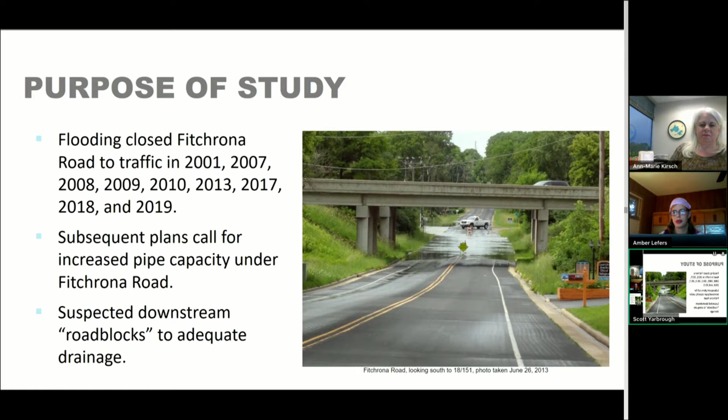So as we looked at a more comprehensive way to address the water levels in this area, we have to look at hydrology and some of the rainfall and natural events that occur. And Claudia Guy is going to give some background history on hydrology and watersheds and the importance of stormwater and drainage management. I'm going to turn it over to Claudia now. All right, thank you, Chris.

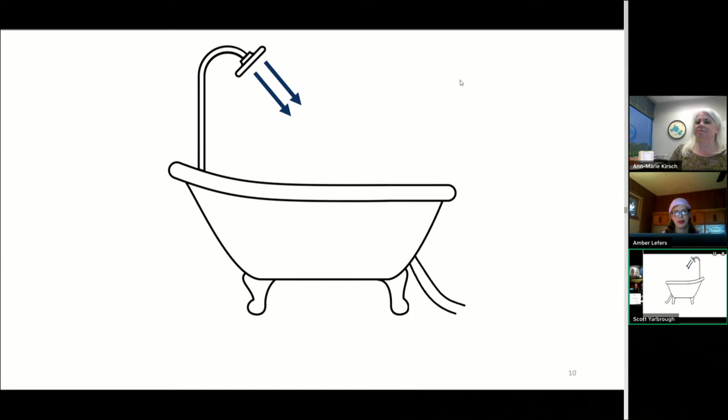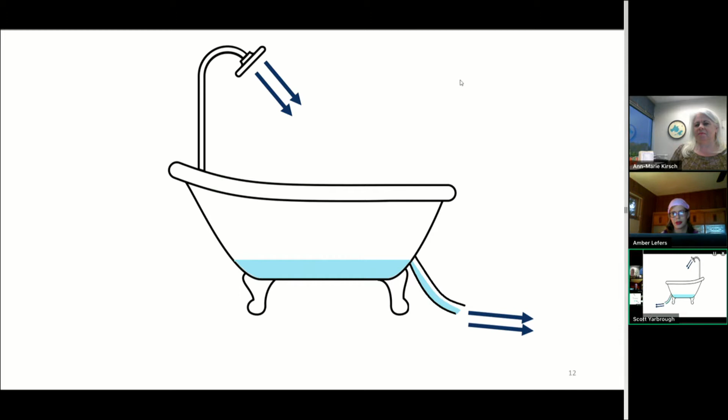All right. So I wanted to start off with a scenario that we're all familiar with, which is we see here a bathtub, and when you turn water on, water can enter the bathtub, and it will eventually rise to the elevation of the drain. And if water is able to exit the bathtub as quickly as it is entering, then water will generally stay at the elevation of the drain until the water is turned off. However, if you were to turn on the faucet,

and I'm sorry, I'm trying to close a couple windows here because I can't see my screen. All right.

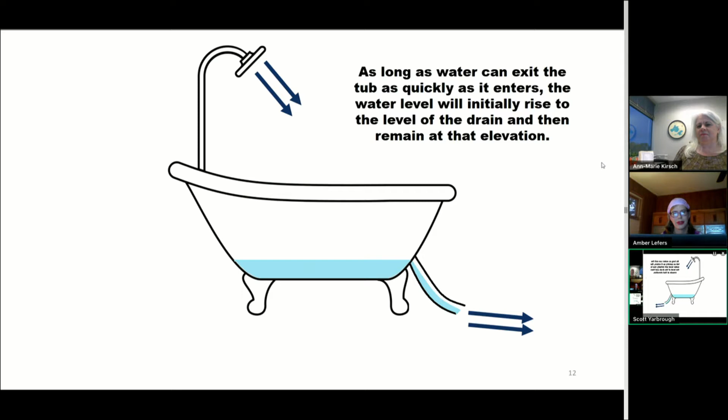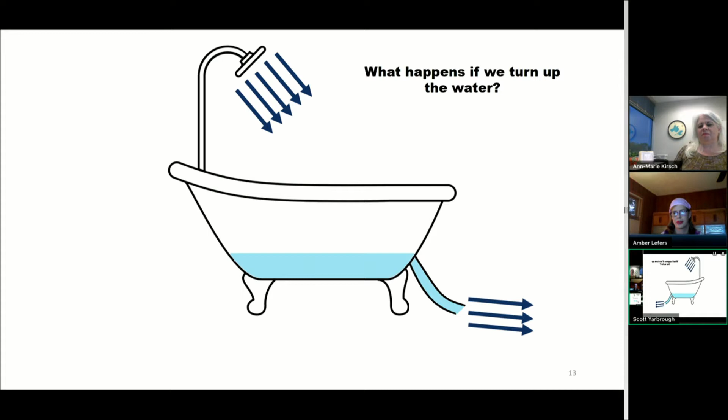So as long as water can exit the tub as quickly as it enters, the water level will initially rise to the level of the drain and then remain at that elevation. And if you turn up the water, then you'll see that water will leave the tub more quickly, but if water is entering the tub more quickly than it's exiting, then the water level will eventually rise.

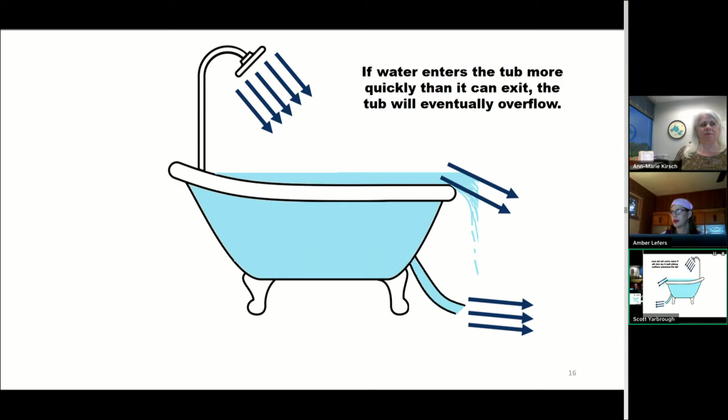So you'll see here that the water level is rising, and then eventually it will find a place where it can overflow the tub. So this was depicted by arrows. You see 5 arrows entering the tub and only 3 are exiting, so that's why we had that rise in elevation within the tub.

So you might be asking yourself, what does this have to do with the Fitchrona Road flood study? So it's a pretty good analogy for a pond. And in this case, you can see the pond has a culvert, which is leaving the pond. And if it were to rain, then water would enter the pond. And if it's a light enough rain, then water is able to exit the pond. And the elevation of water within the pond might not be terribly affected during that rainstorm event.

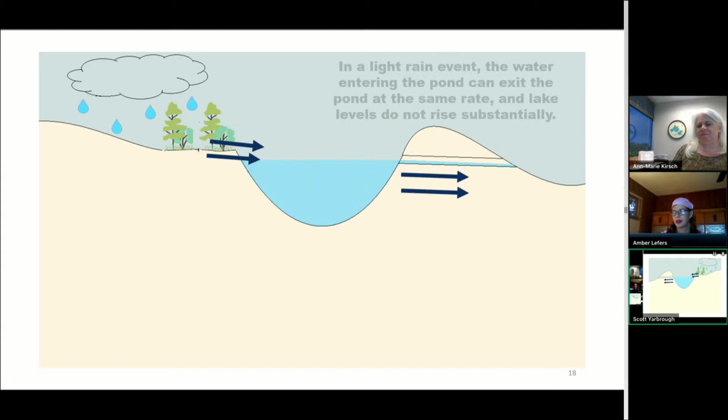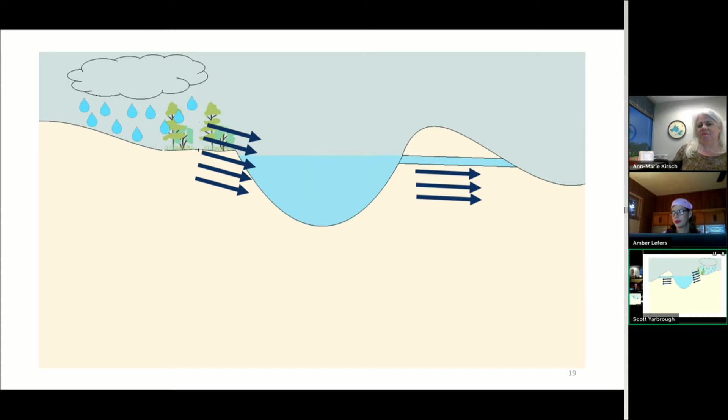However, if you have a much more intense rainfall event, then more water will be entering the system. And potentially, you will have more water entering than can exit. And when that happens, the water level will begin to rise, as we saw in the tub scenario, and it will rise again to the point that it finds a natural overflow path. In this case, there's an earthen berm there, and water will eventually overflow downstream.

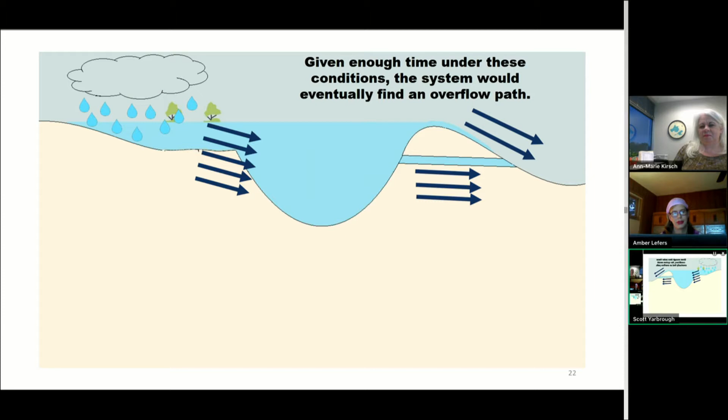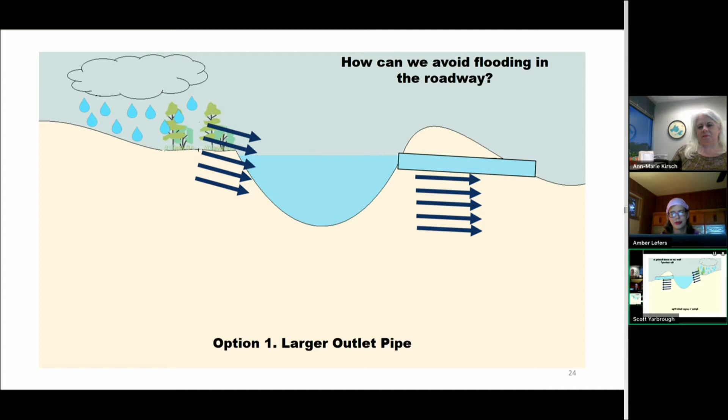So, how can we avoid flooding in the roadway? One option is, of course, to install a larger pipe, which will allow us to send water downstream more quickly. So for heavier rainstorm events, we will have the capacity to send that down more quickly. A second option is to add flood storage capacity.

So in the original scenario, you can see that the culvert is at the elevation shown, and that the water surface elevation in the pond is generally at the elevation of the culvert because it will exit at that point. So when it starts to rain, that's the starting elevation of the pond, and there's a certain amount of vertical rise that the pond can

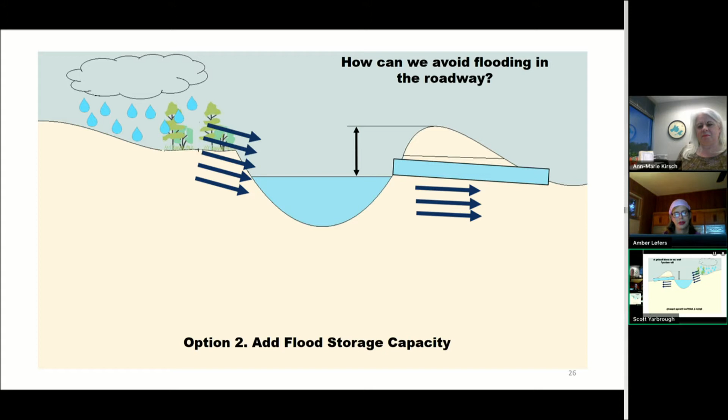go before it overtops. So if you were to install a lower culvert, then the normal pool elevation would be lower, so you would have more capacity for that pond to absorb a rainfall event before causing inundation of a nearby roadway.

And another quick concept that I just wanted to cover briefly is that there might be multiple constrictions that are downstream of the roadway that might cause water to back up. So it's not necessarily just one pipe downstream of the pond. It could be multiple pipes. It could be narrow constrictions, such as narrow ditches, things like that, which could cause water to back up.

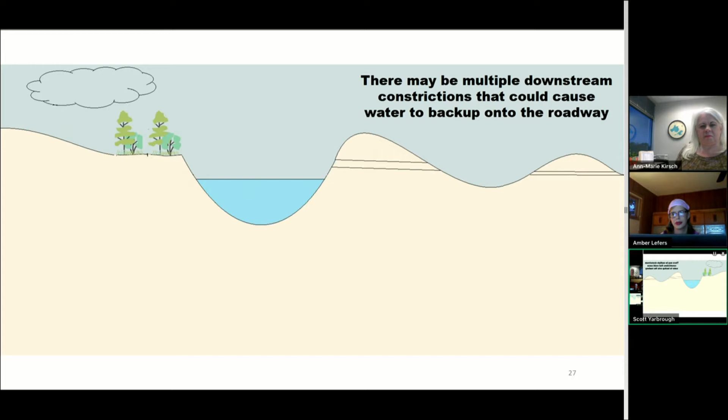So another thing that we're going to talk about a lot in this presentation is storm frequency. So when we do our modeling, one of the ways that we do that is by modeling different storm events. And basically, to explain to you what a storm event is, if you were to put a pot in your backyard on your porch and you kept it there for an entire storm event, at the end of it you would have water in that pot.

And if you measured the amount of water that you had in there, and for example, say you had 2.49 inches in that pot and it rained for 24 hours, in Dane County, that is classified as a 1-year, 24-hour storm event. But if you had, for example, a more intense rain event, the amount of water in your pot might be 6.66 inches over the same duration. And we would call that a 100-year, 24-hour storm event.

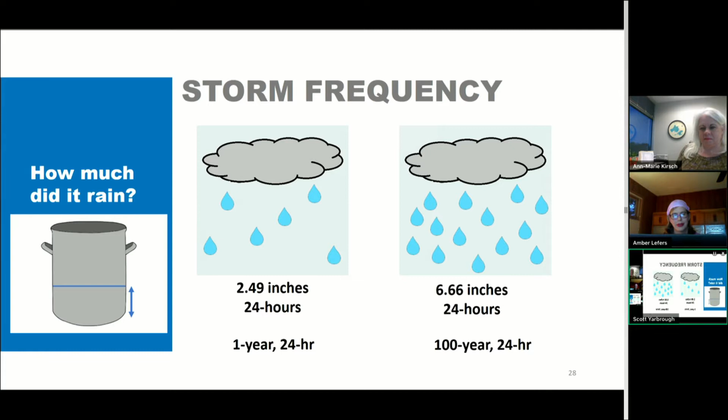Thank you. So what does that really mean when you say the 100-year storm event? When we talk about storm events, what we mean is the risk for a given rainfall total. So the 100-year storm has a 1% chance of occurring in any given year, and the 2-year storm event has a 50% chance of occurring in any given year.

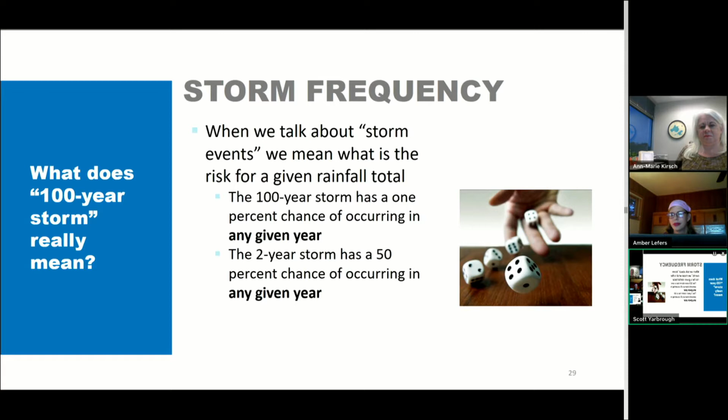So one thing that's important to note here is that it's the probability every single year. If you have a 100-year storm event one year, that doesn't mean that you're never going to have that storm event for another 100 years. Every single year, you still have a 1% chance of experiencing that storm event. And with a 2-year storm, it's like flipping a coin. You have a 50% chance of having that storm event occur any given year.

So another thing that I wanted to just touch on very quickly is this Palmer Drought Severity Index, which basically just shows the wet years and dry years. If it's near normal, then you would not see a bar appear at all, but if it's on the drier side, then you would see a red bar appear here, and if it's on the wetter side, then you would see a green bar appear here. And the higher the bar, the more wet or dry it is.

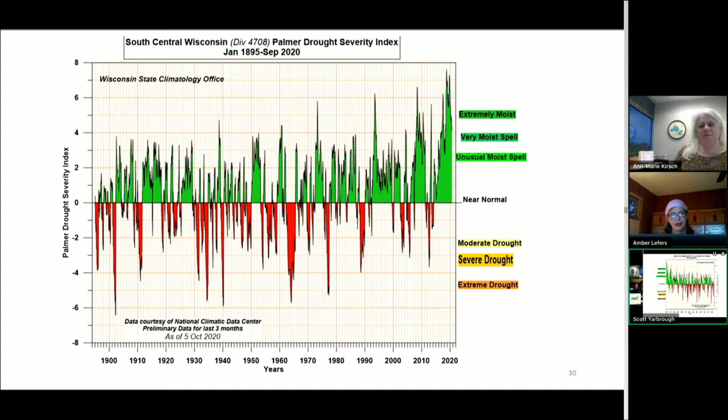And one thing that's interesting to note is that since the 1990s, you can see that you're having a lot more green show up in that area than red, and the bars are much higher in that area as well. So what that means is that we are experiencing wetter years, at least for the last 20 years, and you can see in the last 3-year time frame, it's really been the wettest that it's been since this has been recorded, which is 1900.

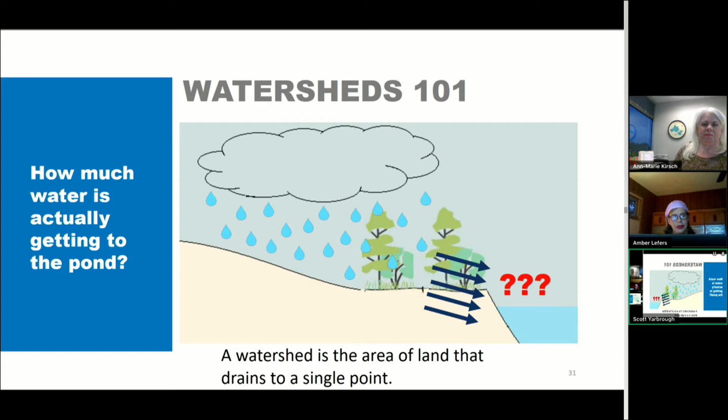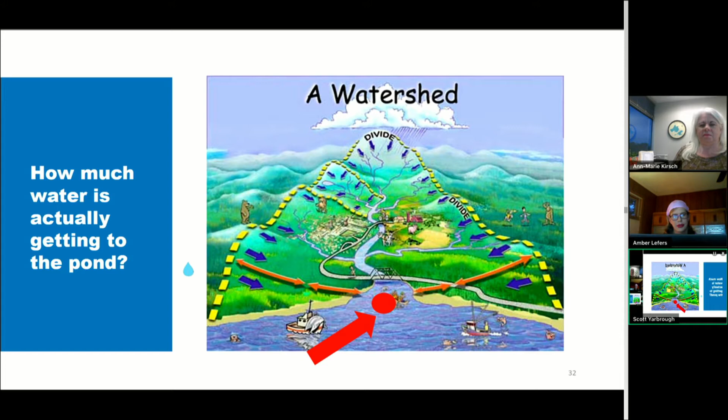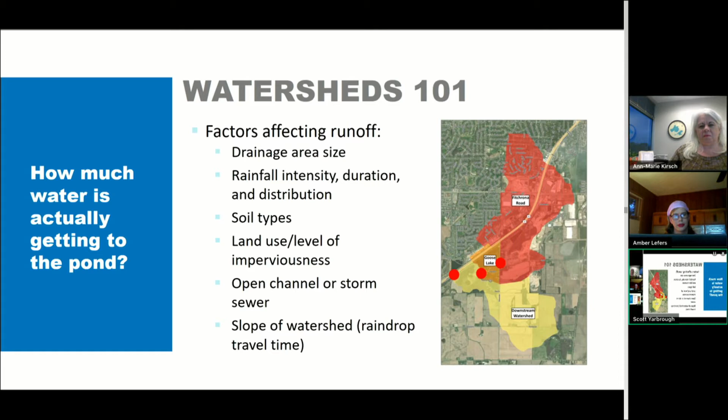And there are several factors that affect how much water actually gets to any given point. And those factors are listed here. Drainage area is, of course, a big factor: rainfall intensity, duration, distribution, soil types, land use, open channel or storm sewer, and the slope of the watershed. Just a few examples there. So with that, I'm going to hand this over to Ann-Marie Kirsch to give a project update.

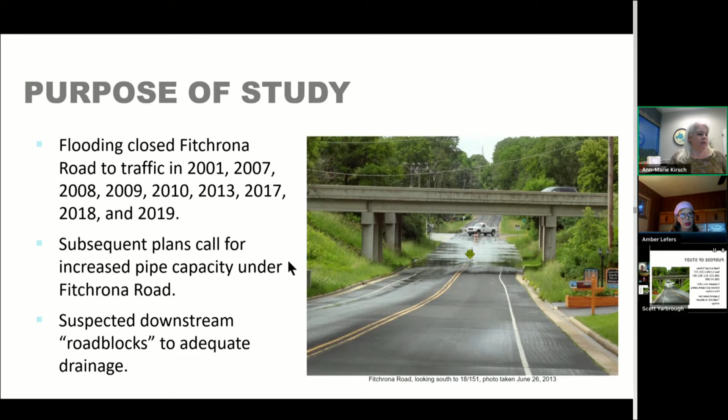So we have looked at doing, how's this going? There we go. So looking at a couple of different options, and we talked about them at the last public information meeting, and we're going to revisit those as well as some new options that we looked at. So first, part of the previous public information meeting was to reach out to you, the residents, to say, hey, what have you noticed?

And what was nice to see is that the responses to the survey really did reinforce what's been observed by both the town of Verona and the city of Fitchburg. So it made us feel like we're really on the right path with looking at these downstream issues.

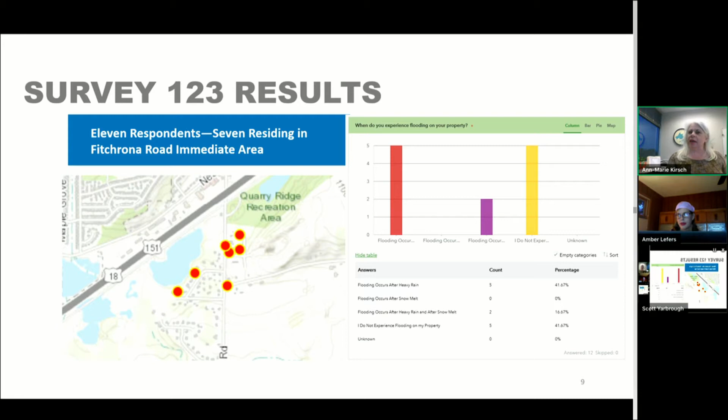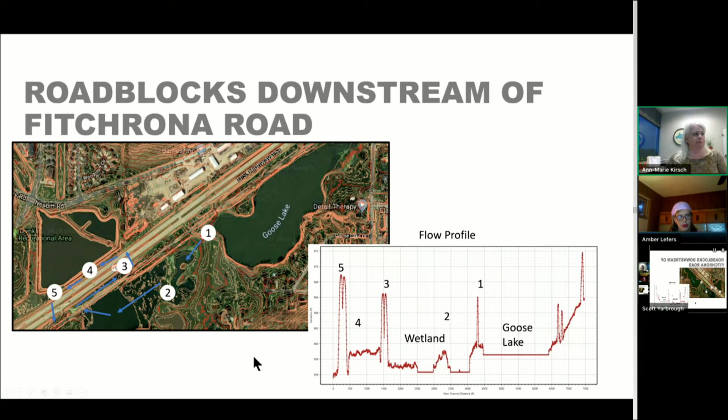Now, we have water flowing through the culvert and back along US Highway 151 and back under, sorry, I forgot, I need to do my, okay. Can you see my highlighter? There we go.

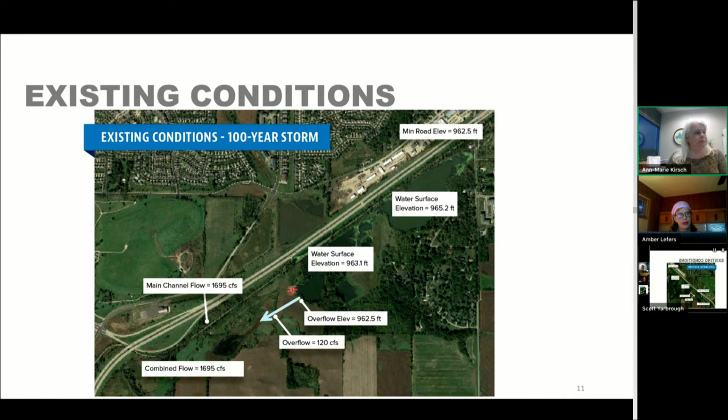So looking at this, we looked at not just the 100-year event, but we also looked at the more frequent storms, like the 2-year storm, which has a 50% chance of occurring in any given year, the 5-year storm, which has a 20% chance of occurring in any given year. And based on this analysis, we would expect that Fitchrona Road would be flooded on average about every 8th year at that 962.5 elevation.

And as Chris mentioned earlier, we are seeing more frequent flooding. And part of that is, again, tied to the very wet years and the length of time it takes for this system to drain once the flooding has occurred. Because if you get a storm when the water level is already high, that just backs it up even more than would have normally been predicted.

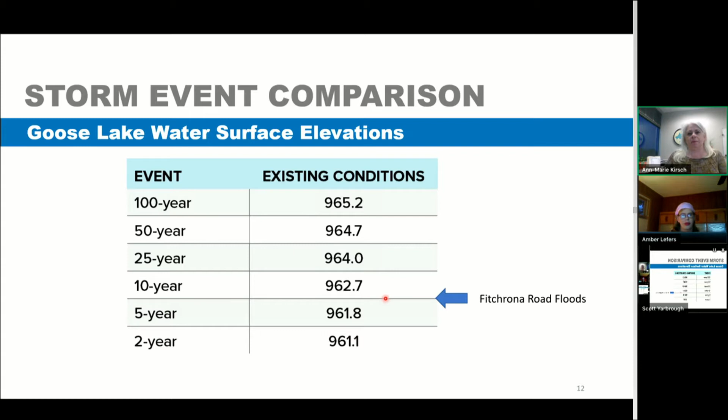So some of the issues we talked about at the first public information meeting, we talked again about the factors that affect the runoff, the size of the watershed, the treatment of the land on it, and so on. And one of the options would be, well, why can't we just raise the road? Raise the road at Fitchrona Road to get it out of the water.

Well, the biggest roadblock to that, so to speak, would be US Highway 18/151 and the overpass. It's already got low clearance. They have no plans to change the profile of these bridges anytime soon. And Fitchrona Road's becoming more and more of a collector or even a minor arterial in the neighborhood.

And then the other issues we're looking at is to minimize downstream impacts to the greatest extent possible, and also regulatory considerations, which include both regulatory floodplain issues as well as wetland and waterway impacts that are managed by Wisconsin DNR.

So to recap what we talked about last time, our option 1 was to increase downstream conveyance on the existing path through the 30-inch culvert. The second option was to look at downstream conveyance with kind of a shortcut on the downstream side of US Highway 18/151. And the third was to increase storage in the system, like Claudia was talking about. What can we do to start with a lower water surface elevation in that tub so we have more room for the water that's coming in?

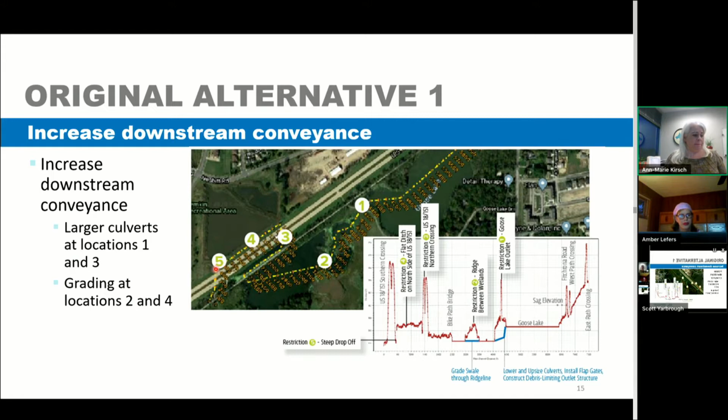Well, as we started looking at this, at first blush, we thought this would work, but it really doesn't matter how big you make that 30-inch culvert or how much grading you do between the wetlands, or if you increase Goose Lake. Because in this case, that triple cell box culvert under US Highway 18/151 is still a roadblock. The 100-year water surface elevation at this location is approximately 963.8. So even if you can make everything upstream bigger, like Claudia was talking about, there's still nowhere for the water to go.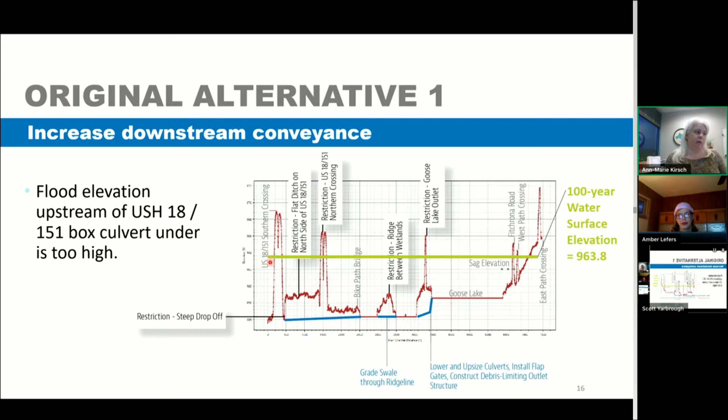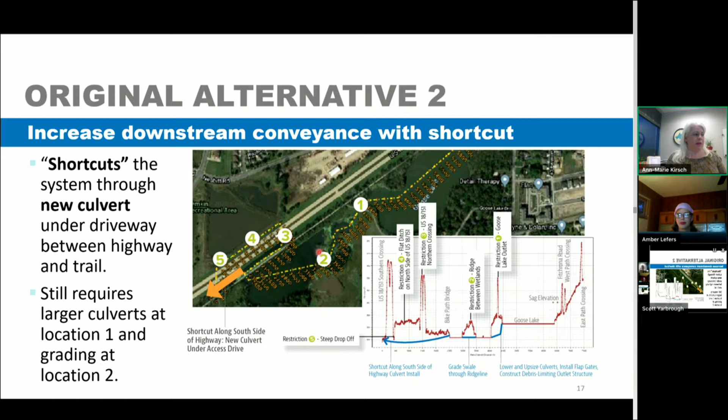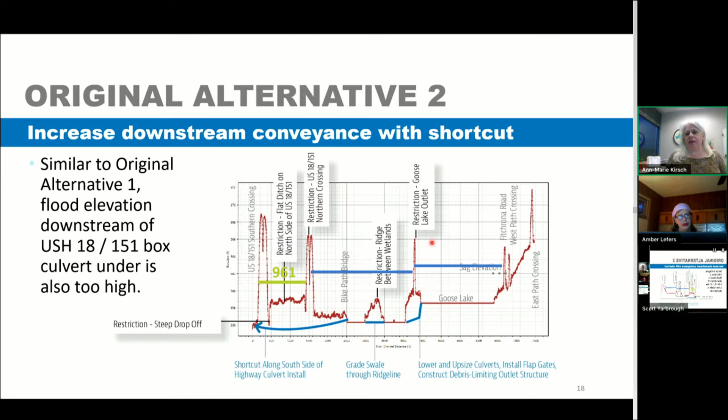Well, even though the water surface elevation is lower, about 961 for the 100-year on the downstream side of the culvert, and that is lower than the lowest sag point of 962.5, it takes a lot of energy. It takes a lot of work for the water to get through this system. And as it goes through the system, it's still backing up to the elevation that would put Fitchrona Road at risk.

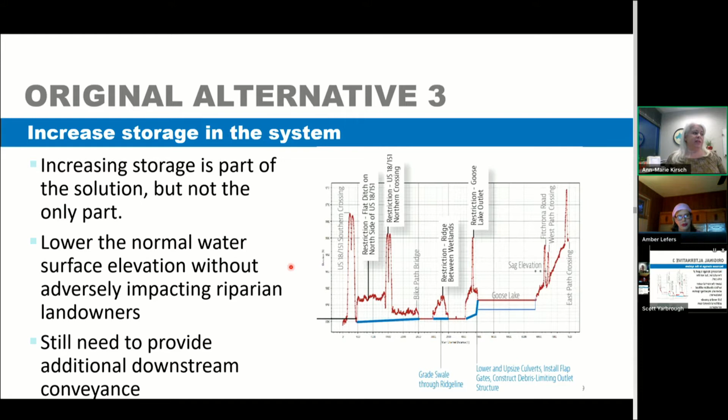So we also looked at storage in the system, and we understand that increasing storage is part of the solution, but not the only part. We still need to deal with these conveyance issues. So what can we do to lower the normal water surface elevation without adversely impacting riparian landowners? And we still need to provide additional downstream conveyance.

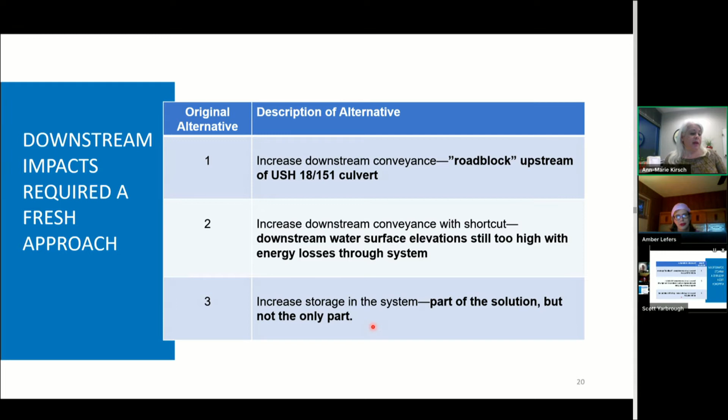So with that, we looked at alternative one. There's still a roadblock upstream of the US Highway 18/151 culvert. We looked at increasing the downstream conveyance. We still had too many energy losses in the system. We still couldn't force the water downstream fast enough to truly fix it for Fitchrona Road. And increased storage in the system is still part of the story, but not the only part. So looking at this, it really required a fresh approach, which will be the next thing we talk about after we answer any questions that some of you may have so far.

So were there any questions? It doesn't look like. Claudia, Amber, or Scott, do you have anything to add before we move on to the next section?

I just would like to add just a little bit of additional thought to the slide of some of the alternatives, 1A and B, and that is... We're not there yet. Are you talking about the ones that we looked at originally? Or are you looking ahead?

I was just going to state that there had been a few different ideas from folks to install a culvert through a driveway along 151, and it had been discussed for a number of years, and at the time it looked like a cheap and easy solution to providing some relief throughout the system. But as Anne Marie pointed out, there were faults with that particular system and idea.

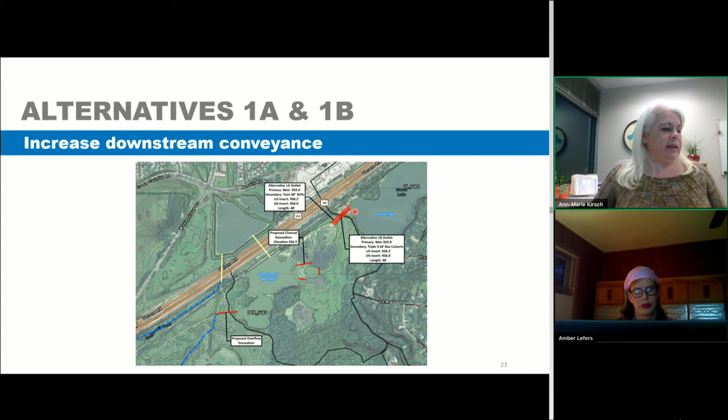So what are the impacts to this? Alternative 1A with the smaller of the 2 outlet pipes with the twin 48-inch diameter circular pipes reduces the water surface elevation for the 100-year event, again, that 1% chance storm, to about 964 feet, which is about a 1.2 foot reduction from the existing conditions.

The other big change is that we're reducing the water surface elevation in that interior wetland complex by about 1.4 feet. And then the final major change is that this overflow elevation is 958 feet, and that changes the overflow from 120 CFS to approximately 305 cubic feet per second. And then again, this water would flow through this little wetland and then rejoin Badger Mill Creek downstream here.

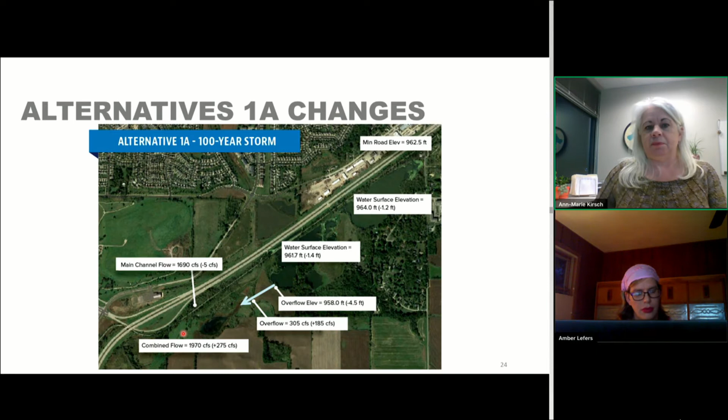Alternative 1B, the big change is that the triple cell box culverts have a significant impact on releasing water from Goose Lake itself. And now for the 100-year event, again, the 1% chance storm, the water surface elevation is reduced to 962.9, which is about 4/10, about 5 inches higher than the low point in Fitchrona Road. Again, the water surface elevations in the internal wetlands are reduced, and the overflow to the natural wetland to the southwest is increased to approximately 370 CFS.

The other big change that you'll see is not just in elevations, but because the conveyance is improved downstream, the time that the road is flooded is greatly reduced. Under current conditions, because the downstream flow is so constricted by that 30-inch pipe, really the only way for water to escape is through infiltration, which is very low because of the types of soils, or evaporation, which takes a long time to evaporate this much water.

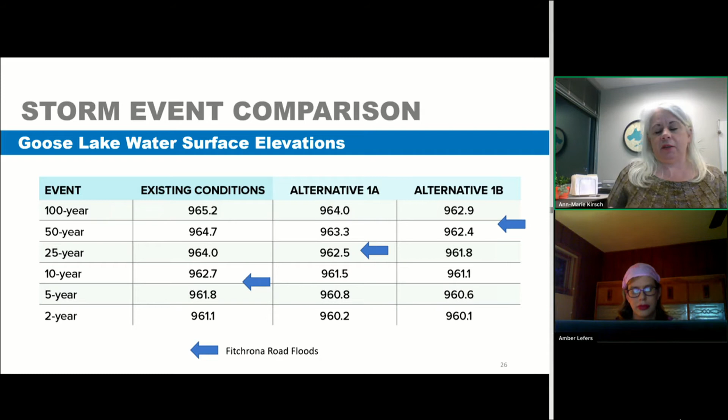Now, the good news that comes out of this is that under existing conditions, we talked about this, we would expect that Fitchrona Road would be flooded at about the 10-year event. So something that's a little bit more than 10% chance in any given year. Alternative 1A would reduce that flooding to about a 25-year event, or have about a 4% chance of occurring in any given year. And then alternative 1B reduces that flooding to between a 50 and 100-year event. So again, it has less than a 2% chance of occurring in any given year, assuming you're starting with normal water surface elevations in the Goose Lake system.

So alternative 2 is similar to alternative 1B, but what we're proposing is to change the downstream discharge location to discharge along Military Ridge Trail. So some details on that. Again, we're seeing the triple cell box culvert out of Goose Lake. We're looking at interior drainage improvements within the internal wetland area. We're looking at a proposed channel excavation again, or lowering this natural knob of this overflow to allow water back out of the wetland system.

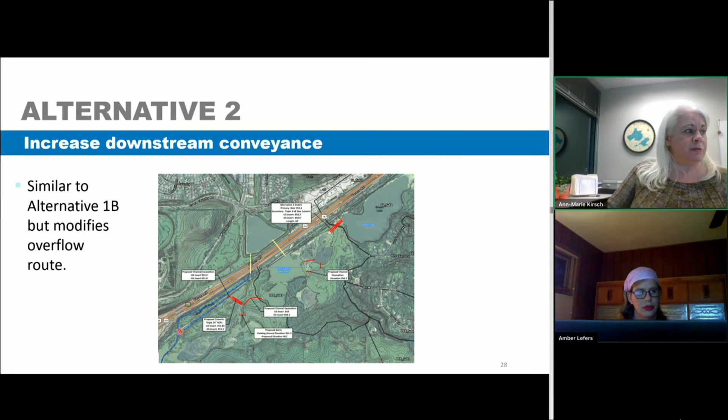But instead of allowing it to flow to the southwest wetland, a berm would be constructed at this low point to force the water under the existing path with some additional culverts, like 3 24-inch circular pipes, and then further excavation along the Military Ridge Bike Trail to the point of confluence where these two streams flow together downstream of the Military Ridge Trail.

So what does this mean, or what does this do? So in this case, the water surface elevation is about 963 at Goose Lake for, again, the 100-year event, that 1% chance. The water surface elevation is lower, again, in the internally drained wetland areas. And the overflow is increased from approximately 120 CFS to 360 CFS, but is kept along the Military Ridge bike trail.

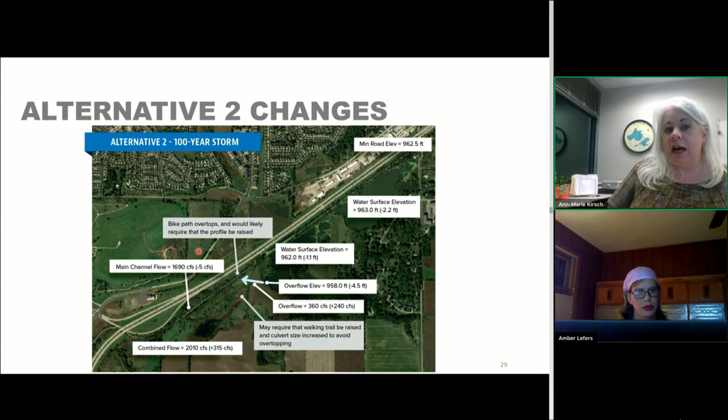Now, some of the challenges with this is that the bike path, according to modeling, would overtop and would probably require some changes in the elevation of the bike path. And the walking path may also overtop for these very large events. Good news is that people generally aren't walking in the Dane County parks during the 25 or 50 or 100-year events.

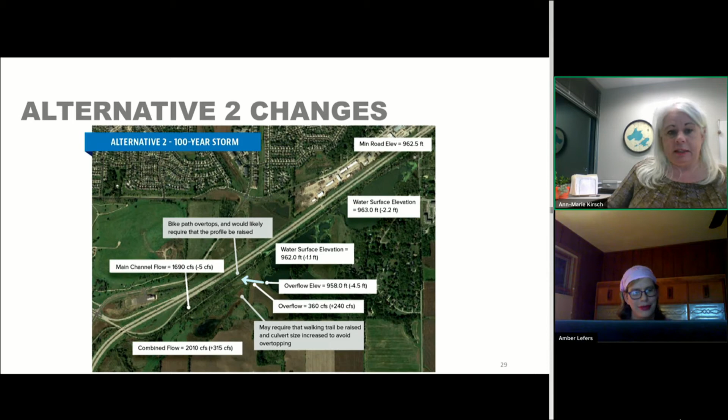So with that, if we look again at the changes in flood protection or the level of service achievable for Fitchrona Road, for alternative 2, we're at about the 50-year event. So what this means to us is that whether the flow flows along Military Ridge bike path or through the natural wetland, it doesn't have a big impact on what's happening in Goose Lake.

The biggest change is just allowing that water out of the system and also letting the water out of Goose Lake itself through a larger outlet structure. So the final piece of this puzzle that we talked about earlier is, well, what can we do to make that include additional storage in the system?

In this case, our outlet structures are much lower than the existing ones, but in order to get them to function during high flow events, we put this kind of weir on there, as well as to keep the regular water surface elevation that everybody's used to. We said, what happens if we can lower that water surface elevation a little, by removing that weir and letting water flow freely through Goose Lake.

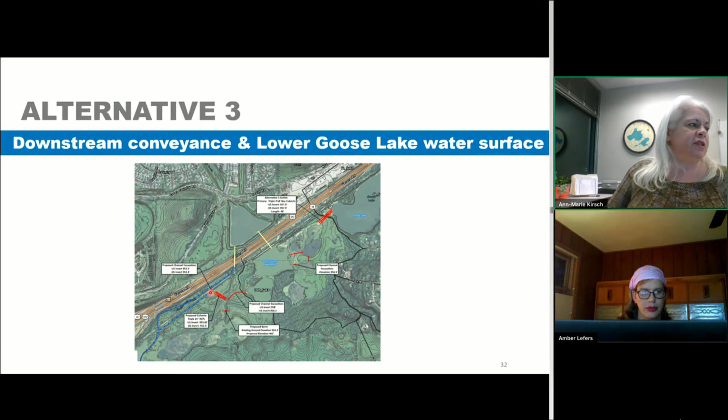So in this case, we still have the triple cell box culverts, but we do not have the weir holding. So now we've lowered the normal water surface elevation by about 1.5 feet. Still have the interior drainage improvements, outflow improvements or changes at the natural outflow, culverts draining to Military Ridge and the workaround along Military Ridge.

So same thing, we're finding that bike path may also need to be raised to avoid flooding during super high flow events. Might be some impacts to the walking trail during high flow events. The water surface elevation, again, is about 962.7, a little bit higher than the 962.5. But when looking at the tables that we've looked at before, we're still in between the 50 and 100-year level of protection for Fitchrona Road.

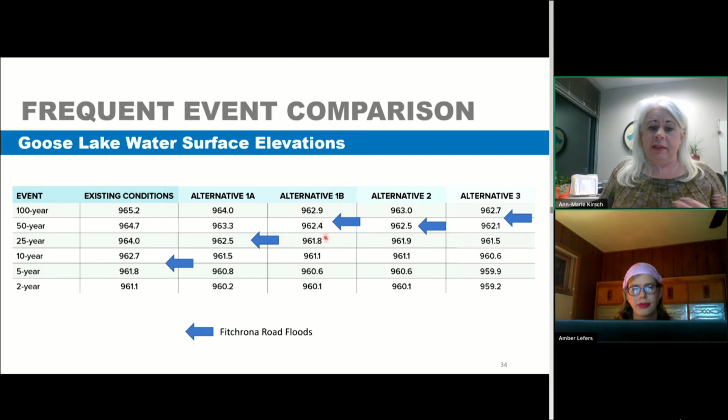So what this is telling us, again, is that changing these outflows really has a big impact on the level of flooding and the duration of flooding on Fitchrona Road. So to wrap this up, we've looked at a number of different concepts that really changed as we started to get into this project. But what we also found, talking to the city and the town, working with Claudia and Chris, is that they're looking at, well, what happens if we mix and match? And that might be our best choice.

So looking at a combination of alternative 1A, which was the smaller outflow structure, so the twin 48-inch culverts at Fitchrona Road, but keeping the flow to the southwest, and then also lowering Goose Lake by dropping those inverts, the pipe elevations out of Goose Lake. So that's something we're going to talk about a little bit more in our next steps.

So one of the big pieces is, how much is this going to cost? Alternative 1A is about $301,000, all the way up to alternatives 2 and 3, which get into the $600,000 range. And the question is, are you getting that much improvement for that amount of money? And that's what had us look again at this preferred combination of the smaller outlet without the weir to hold the water level up, and still doing the downstream, with less construction work downstream. So again, for this type of project, high level costs potentially about a $300,000 project.

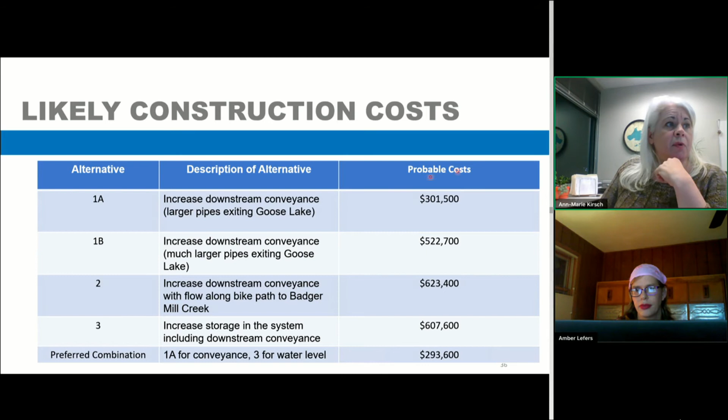So now I will keep the presentation, but I'm going to turn it over to Chris and Claudia to talk a little bit more about the next steps.

Thank you, Anne Marie. So our next steps will be to confirm the preferred option of the combination of 1A and alternate 3, and then go back and look at Fitchrona Road and the design and the impact there, as well as look at some of the impacts of lowering Goose Lake and the impact it would have on the riparian property owners, shoreline, water access, things of that nature.

Then the next step would be to meet with the DNR and look at permitting requirements, what would be required for us to do the work. Then there are some grant funds that may be available. There'd be a process that we could look for, specifically some FEMA grants for high hazard mitigation, and this may qualify as that type of a project.

And then we would have some decision points, and that would be buy-in for this amongst all the stakeholders, that would represent not only the town and the city, but Dane County, they're a property owner, the Madison Metropolitan Sewerage District. They have a pump station in this area, so they also have some stake in this project.

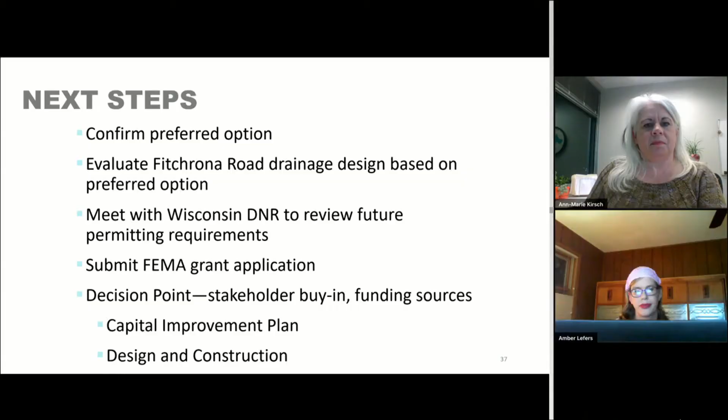And we'll see if we have any follow-up questions on the technical aspect of the alternatives. Sure, I've seen a number of questions pop up here. A couple of them relate to what are the impacts or the effects of increasing the volume of water going downstream into Badger Mill Creek. And I'll have Anne Marie answer that question.

Okay, so there's two different things that are going on here. One is the volume, which is how much water, and we're not changing the volume, but what we are looking at is possibly modifying the flow, how fast and when water arrives. And yes, this is an issue that we're still working with the city and the town. We definitely need to talk with impacted property owners.

Water is getting there one way or another. The challenge is we've talked with DNR in terms of floodplains. And the original floodplain analysis didn't account for any of the storage in the system of Goose Lake or the wetlands. So regulatorily, we're not changing anything. But the question comes up in the real world, are we affecting how people are perceiving the water and how it's reaching their property?

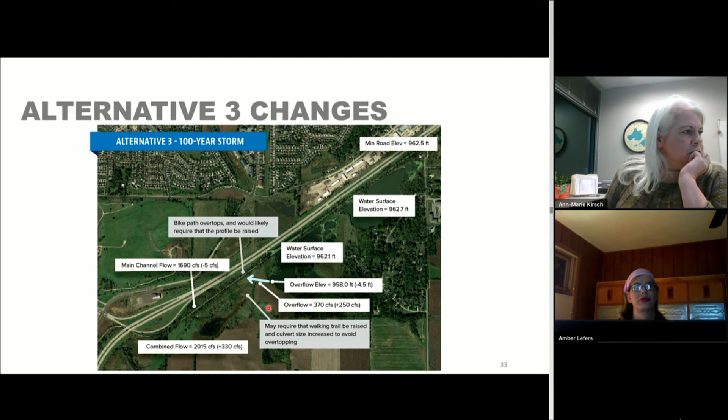I was going to suggest maybe, Amber, if you could go back in the slides to the map, just kind of point out this area. I can, just a second. I'm having issues with my pointer. Can we do that? I'm trying to get the slides back. There we go. This area in here, and this area. Is that what we're? Yeah, that's what I interpreted the question to be. Yep, the area right where your cursor is. Okay.

Right, and the other issue we may have, and I can't answer for sure, but because it is designated parkland, that may introduce some complications. But again, unless you can lower the normal water surface elevation, it will fill up over time.

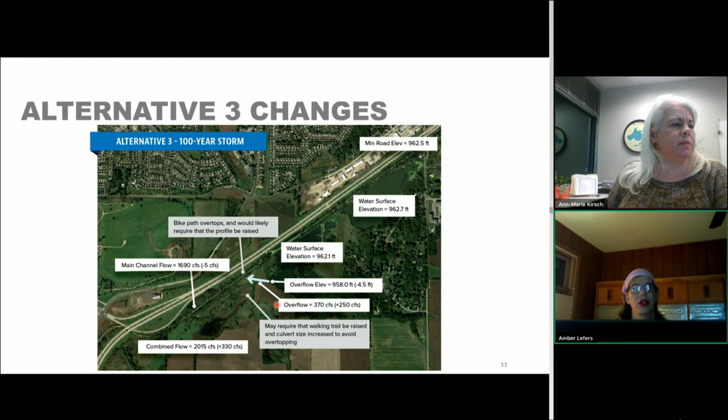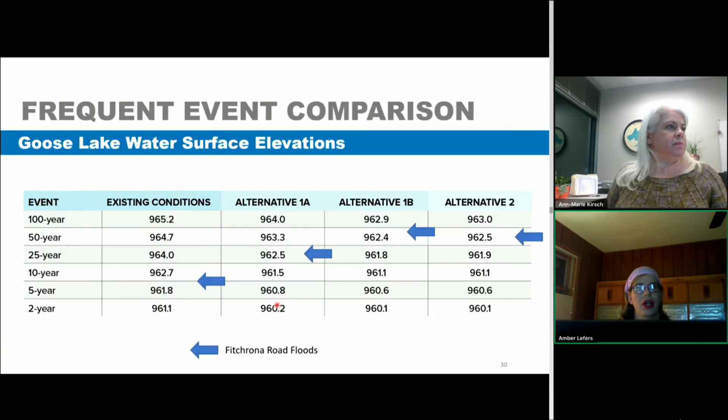So another question came in related to development to the east of Goose Lake along Lacy Road, and whether that additional development is adding flows to Goose Lake. And I'll take this since I'm a little bit familiar with the stormwater management plan, and I'll also open it up to Claudia as well.

So the stormwater management system for that development that's happening along Lacy Road has a fair amount of infiltration designed and a lot of kind of local stormwater management systems. And so there's a lot of controls that are already in place to control that runoff. And then a lot of that water goes first to the Quarry Ridge Basin that's to the east of Fitchrona Road, where water can be stored there as well. Claudia, did you want to add anything about that development stormwater management plan?

No, I think you did a good job explaining. It is meeting the regulatory requirements for rate control, for water quality, and for infiltration. And yes, and then it goes to the Jamestown Basin, which provides more water quality before going to Goose Lake.

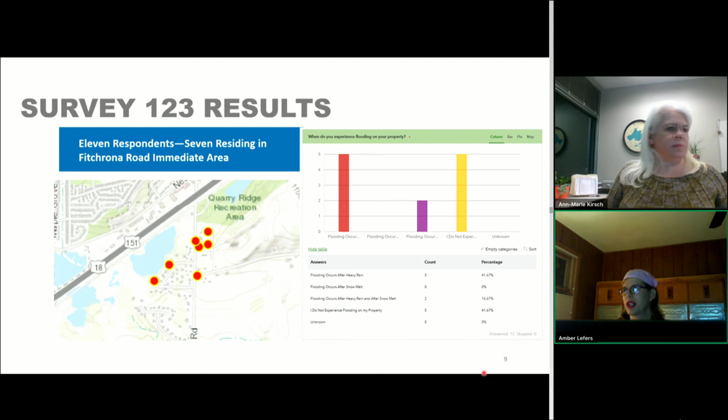We did get some clarification on the location of that 60-inch culvert. It says it's in Badger Mill Creek at the airport, at the intersection of Badger Mill Creek and Sugar.

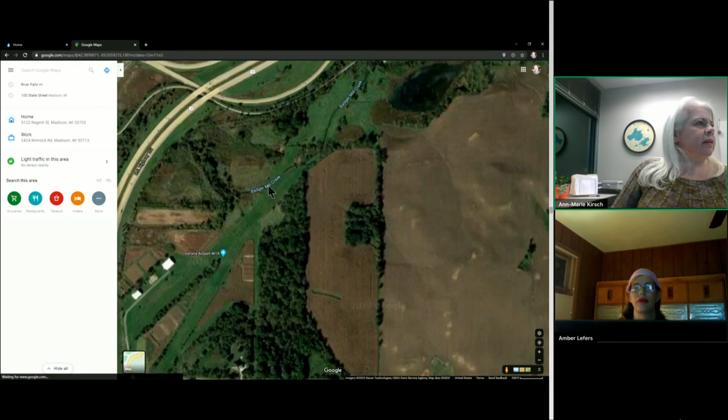So I think this is one of the things that we can probably... Yeah, I think this is a conversation outside of this meeting. Yeah. So we're talking, I think it might be right there. This guy here? I think so. So, yeah, Bill or Rob, we will follow up with you after the meeting, just to make sure that we're all on the same page.

So another question that came in: did we consider diverting water into the Madison sewer pipe that goes to the outfall? And I'll have Anne Marie answer that question. You mean the return pipe, the effluent pipe that goes in? I believe so. That was not a consideration, but I know that I did some analysis looking at this as part of a previous project.

And when we start looking at how much flow is really coming out of this pipe, on average, it's about 1 cubic foot per second. And there's no way that this system would have the capacity to divert that flow. And also, this is part of MMSD's regulatory requirements, and we really don't want to mess with their monitoring data that they need to do to keep US EPA happy. Yep.